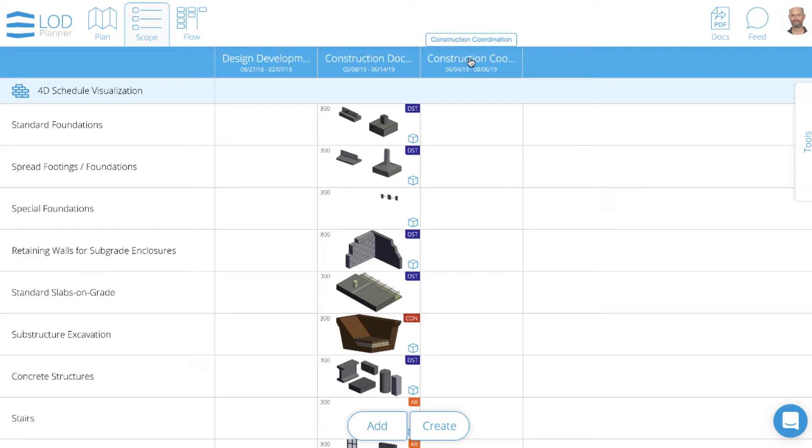Let's look at some of the LOD schedule scope that Michael's been working on. So we have our design development, construction documents, and then construction coordination. This is the scope that we're developing for our LOD schedule, just to really begin a discussion.

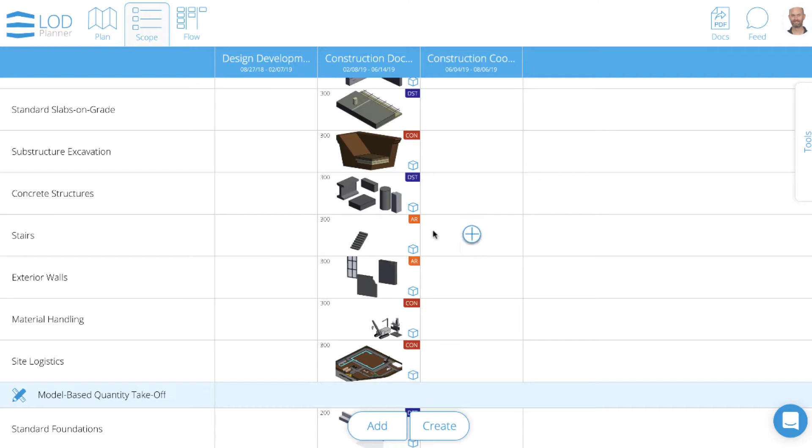We're going to use the architect's model to do the stairs. Structural engineer, we're going to use their concrete model. We're going to model the grading.

So model-based quantity takeoff, this is a great way to start a discussion around what we want to quantify. So this is our model-based quantity takeoff scope.

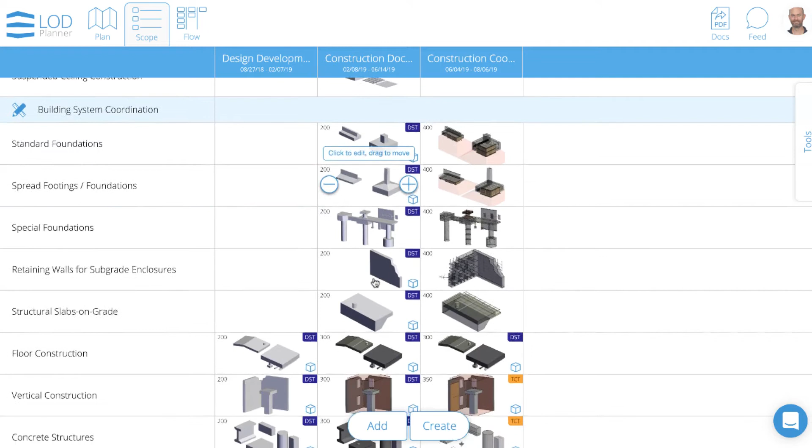And then we get into building system coordination. So we're doing some design coordination right now. This really helps me set expectations with the design team around, hey guys, I'm going to use your model. This is what I'm looking for, with a budget on top, saying here's the line items we added. This is the additional scope. It's just a great scoping tool.

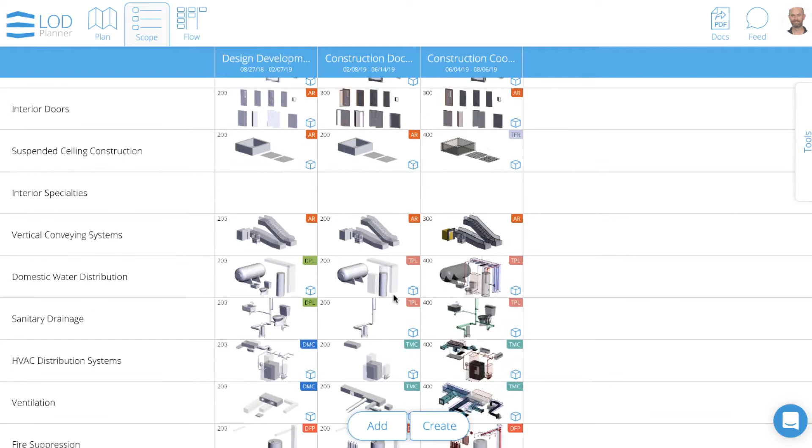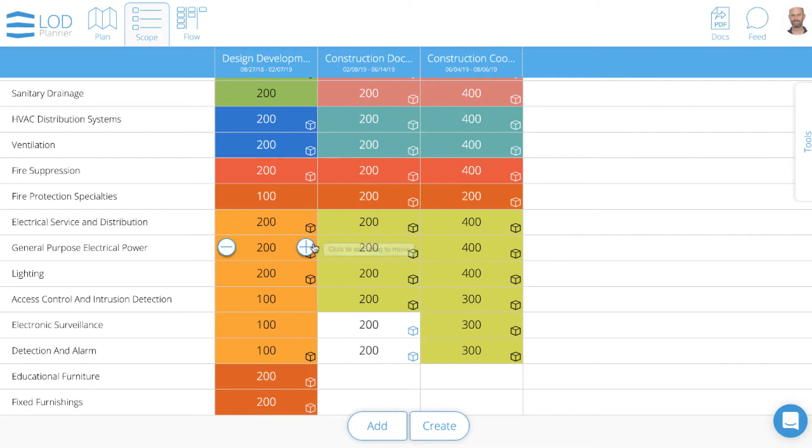So construction coordination, you can see there's a little bit more detail. If we turn the images off, I get really excited when we change colors. And then when the LODs change, as I mentioned, that is a signal to me that we're adding value somewhere. It's just a visual sort of cue.

This is a discussion we had yesterday around all the systems we validated using the point cloud. So we're saying, all right, this is what we can guarantee. We own it.

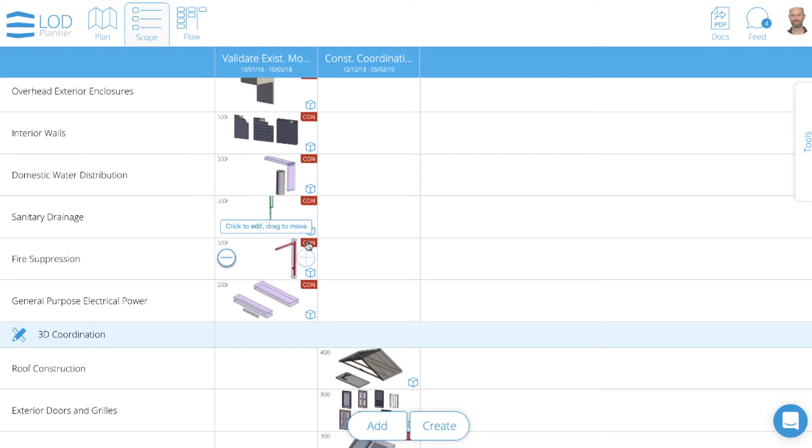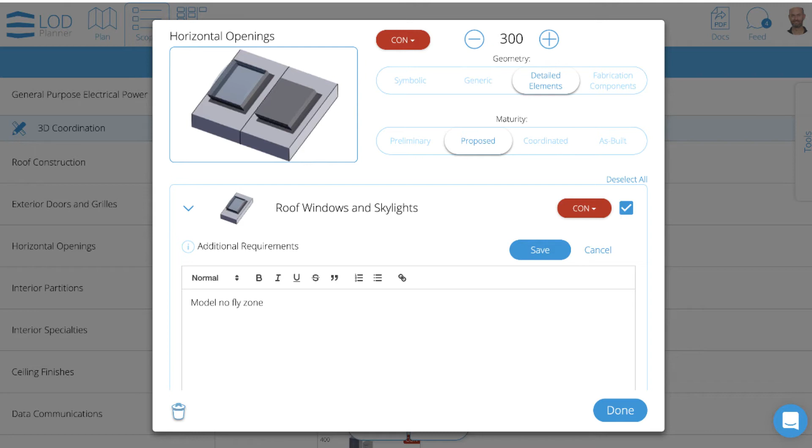This is all the stuff that I picked up in terms of scope for my team to model. Skylights - put an additional requirement, model at, let's say, no-fly zone to floor. Because you don't want to pay for a skylight that's being covered by a duct, right? And that would be a great addition to the scope right here, having a clearance to the ground. So just an idea for you guys.

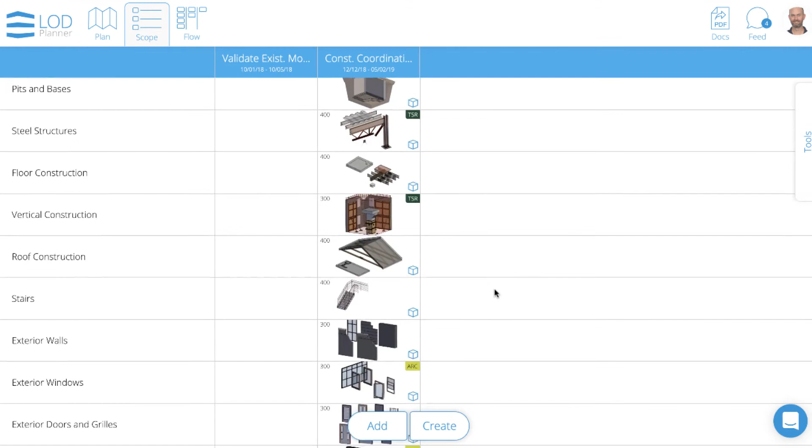So if I unisolate my scope, this is within the context of the rest of the project. We have in-house concrete modeling. So we have our team up in Seattle that did a lot of this stuff really early on.

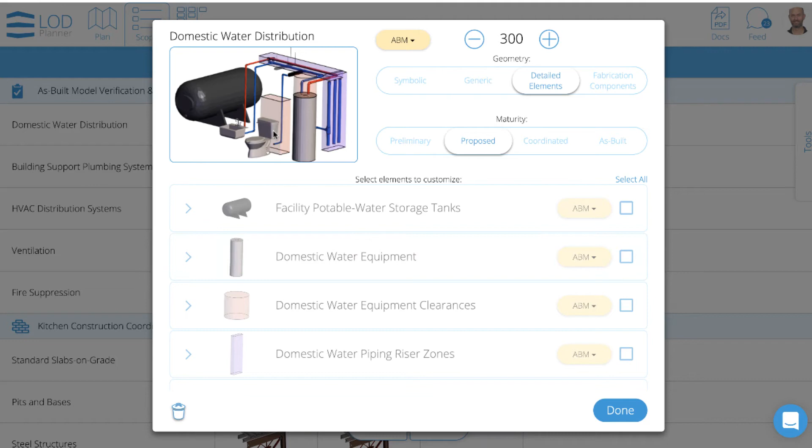Let's go to another one. This is a good example of taking a new look at validating a model. So we got a model from an as-built modeler. This is an interesting handoff where we're saying, okay, this is what we got. We added value, you got a point cloud, and we're going to validate the model. And we're going to say it's LOA 20.

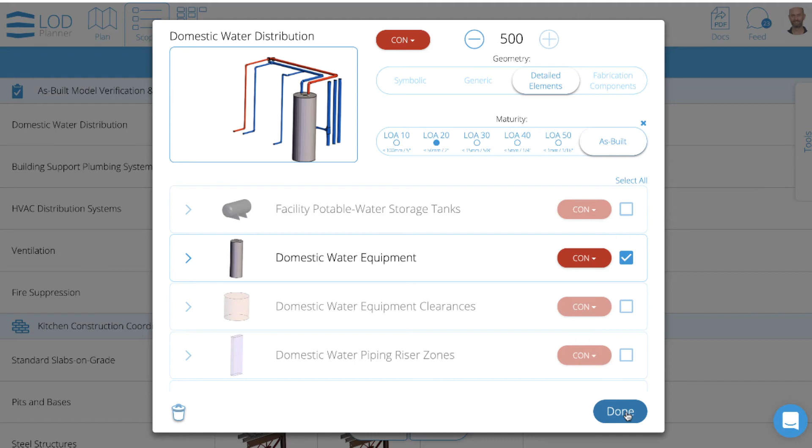And these are the systems that we compared against the point cloud. And in some cases, we actually moved the model geometry. So really, in a snapshot, this shows what you can rely on.

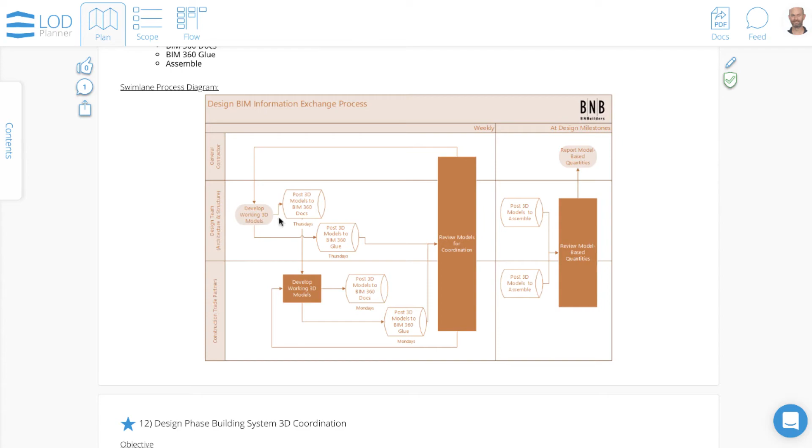Let's take a look at, I said I love the swim lane diagrams. I think we might have drank from the same well. So this is design team, construction trade partners, and then the general contractor. And the idea here is that this is all under the information exchange.

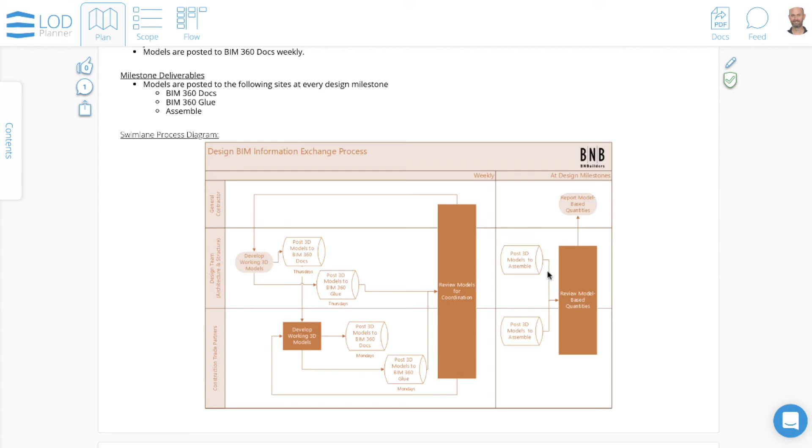We're developing working 3D models, posting to docs and posting to Glue on Thursdays. Yes, you have to post to both separately. And then we review models for coordination. And then rinse and repeat. And then at a milestone basis, we're posting to assemble, and then review model-based quantities.

As you can see, we can talk about this stuff all day. Using Matterport - oh, we use Matterport, yeah. So you can embed a Matterport in here, so you could let the client kind of walk through it in the same browser. Or even like 360 photos, yeah. The options are now exploding.